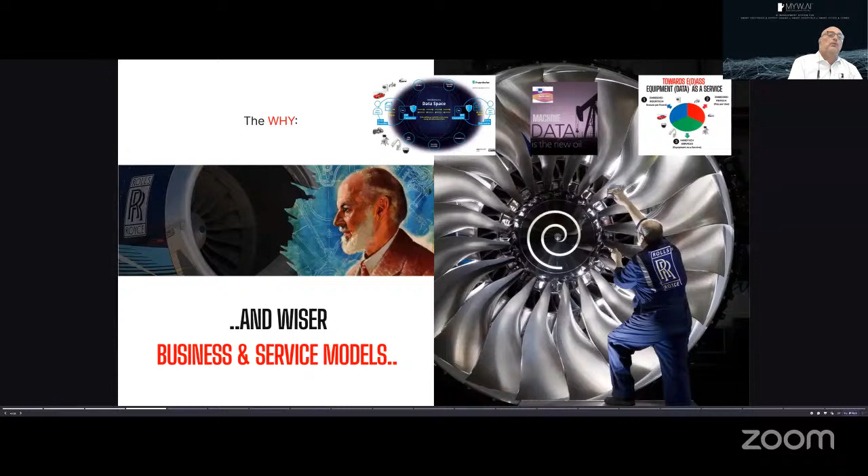We were quite lucky to get a lot of investment from the European Commission and the European Space Agency for the technology. Today, having developed and tested the system, we see smarter machines coming out more and more every day, not only in very critical assets and infrastructures like plants and smart cities, but also in energy tech fields and ports, and even new markets like those producing electrolyzers and green hydrogen.

Up to clinics and hospitals, where wearables and machinery are getting more and more connected and starting to deliver new services and goods on a continuous basis. It's really a revolution happening while we're talking. The ecosystem around these machines is getting more broadband and connected, and the machinery is getting more intelligent.

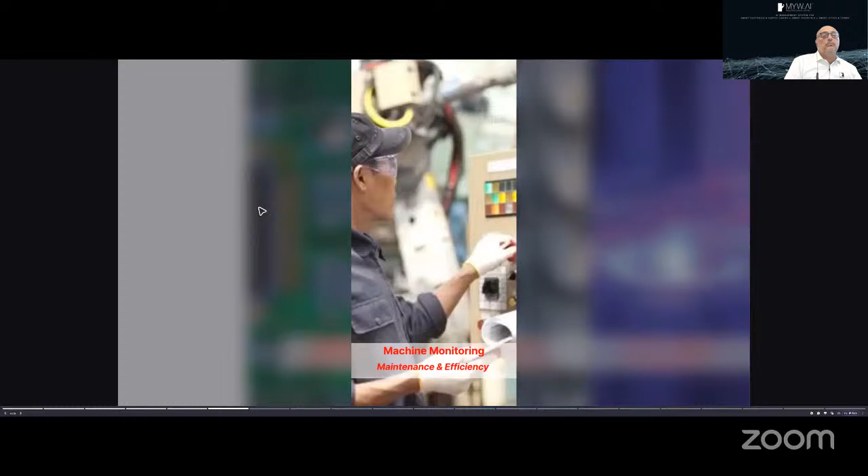At that point, it's quite evident what services you can deliver, starting from the most traditional ones: reducing downtime of machines, which pays for the deployment quite easily within the first or second iteration, because machines break down very often, and just a couple of minutes of stoppage in the automotive industry is worth billions of dollars collectively in the US per year.

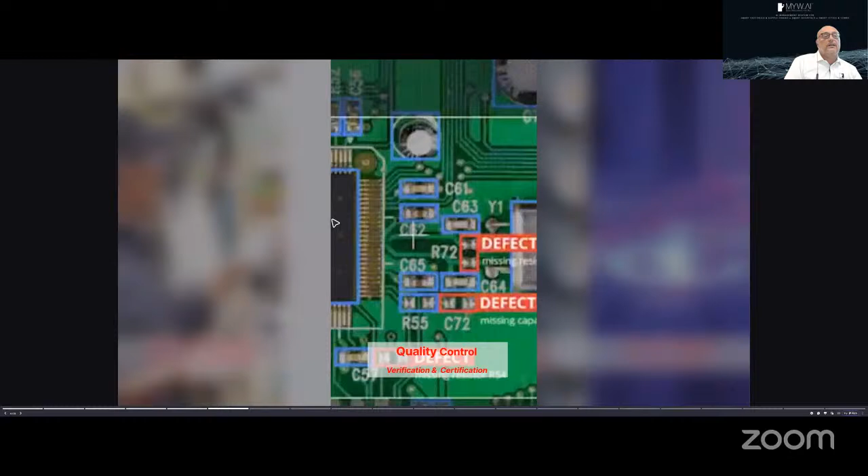The other big market is quality control, where you can go online and verify and certify the goods you're producing, down to energy saving, another big buzzword of the moment, where you can study the consumption behavior of your machinery and maybe pay the grid and pay for energy at optimized timing.

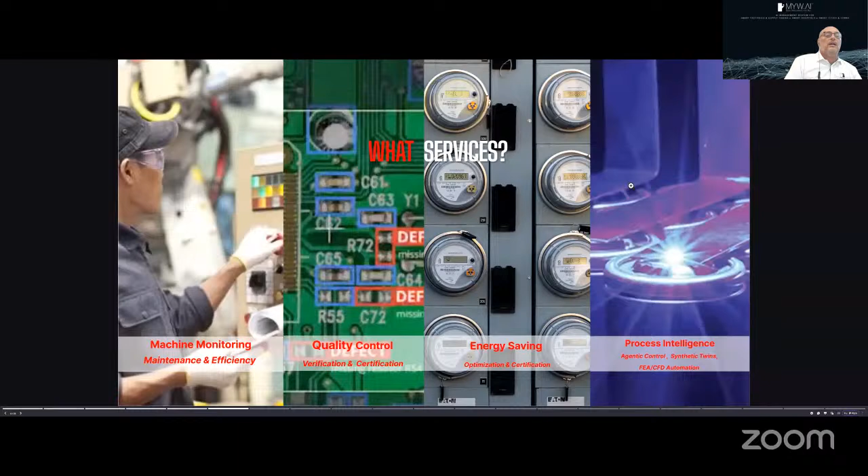And last but not least, the new frontier, which is not only controlling machines in terms of quality of production and breakdown times, but also feeding back control with AI agents able to control, instead of PIDs and other controllers, how the machines themselves work.

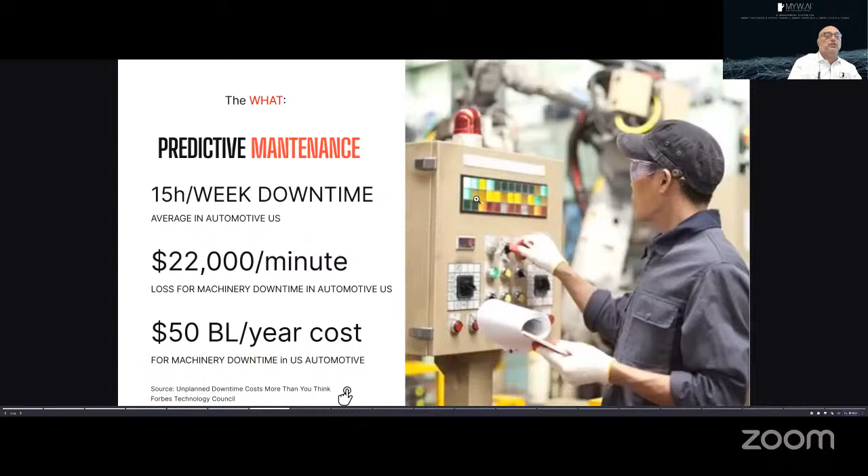So we start with very traditional markets - 50%, 80% of our implementations deal with predictive maintenance. I was summarizing the numbers before: huge breakdown time and cost. This is just for automotive in the US, so 50 billion dollars a year cost just for those minutes that machines stop in the automotive sector in the US, plus huge cost for missed quality.

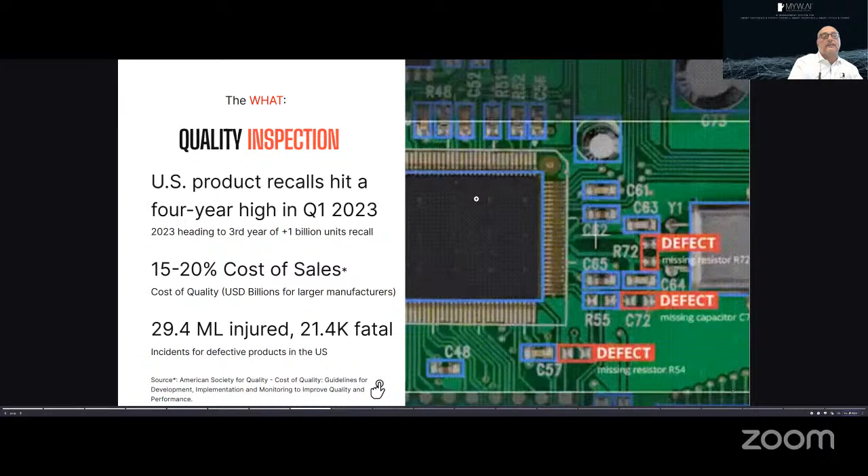So the missing quality cost is huge. It's averaged up to 15-20% of the overall cost of sales in manufacturing. There's not only production and business issues here, but people can also get injured by wrongly produced assets, so quality inspection is another huge market.

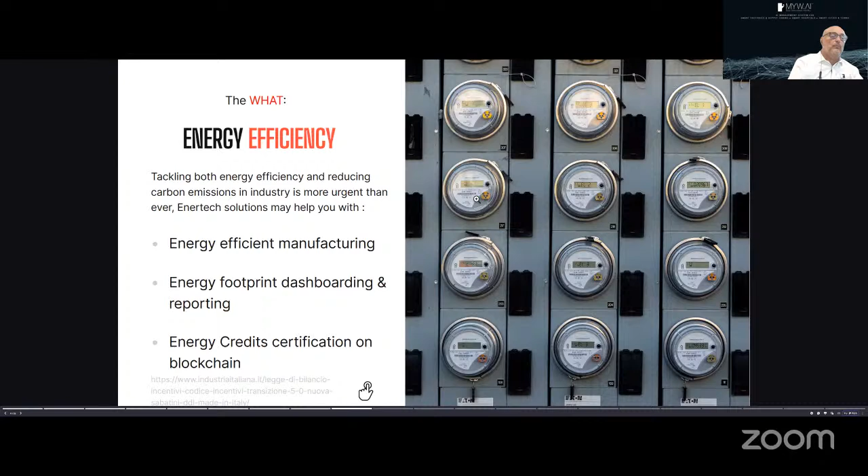When it comes to electricity gains and electricity optimization, efficiency of manufacturing machines, there's a lot of regulations coming out worldwide, where you get energy credits if you can certify, maybe on a blockchain, that you're actually consuming less from the grid thanks to optimized usage of the machine itself. You're surely seeing this in your organizations, tackling it from different perspectives, POCs up to big systems, working more or less effectively, but this is all quite well known.

What's happening while we are talking is that these things are getting even more nested inside the production processes. We are seeing the emergence of what is called agentic AI, where AI is not only able to get data and analyze it, but this data is becoming multimodal. So you can also hear from a production line what sort of defects are going on, you can see them with thermal cameras, touch sensors, or whatever, or you can have time series, and blending these together is much more effective as insights to machine learning than monovariate streams are.

The other thing these agents are able to do is start reasoning. They're able to do things like chain of thought, which is getting very popular with the new ChatGPT outcomes. You're actually able to take a sequencing if-then-else approach to the things that you're sensing, and also use external tools to actually do the sequencing of your decision making. This actually means a very clever AI, which can be put together with humans in the loop to control machinery and what's coming out.

And the next steps are going to be physics, maths informed information, spatial intelligence, and so on. This is what we're working on in MYWAI. We are adding to the platform the ability to control machinery. So for the Stellantis case that we will see, we have reasoning agents which are substituting PID controllers.

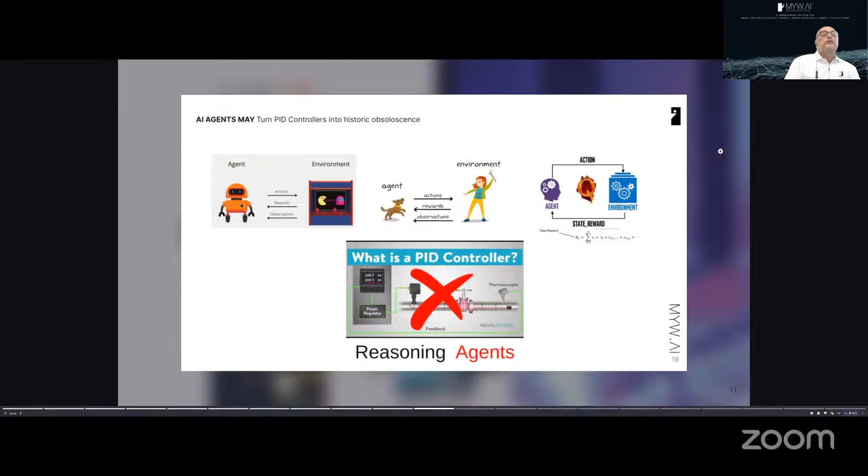So these things can be controlled live by a robotic agent, which actually sees what you are doing with the machine, how the machine is actually performing. And if you give it rewards, it's able to learn the law of what is actually controlling much better than a PID. So reasoning agents are coming to market, and these reasoning agents are starting to learn physics and maths.

So you're presumably using computational fluid dynamics or finite element analysis in your designs, in your buildings, in your machinery. But those softwares are very costly. They come with errors because it's a finite analysis, and also they are very latent, so it takes a lot of time to actually do simulations.

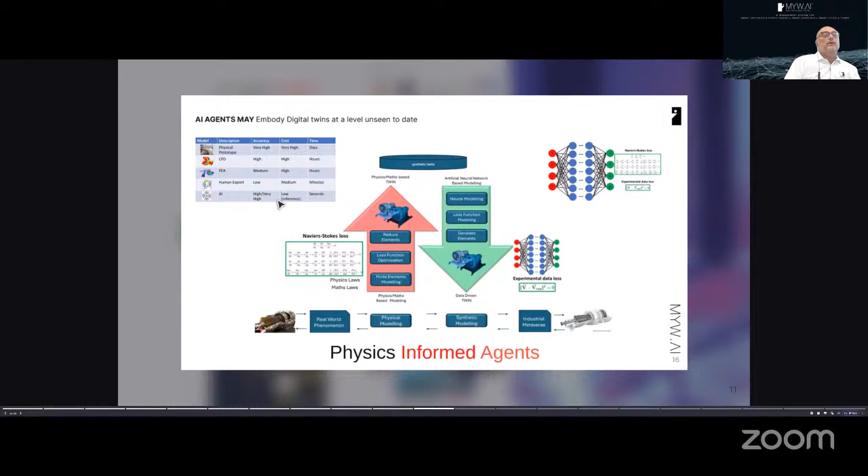Now AI is not only learning text or sentences, it's actually learning physical laws like Navier-Stokes and others, so that they can create digital twins which have got a soul managed by AI, able to actually react to the changes that humans are giving them while they are operating. And this can happen, as you see up here in the top left corner, much faster and with much better accuracy than traditional FEA software or CFD software.

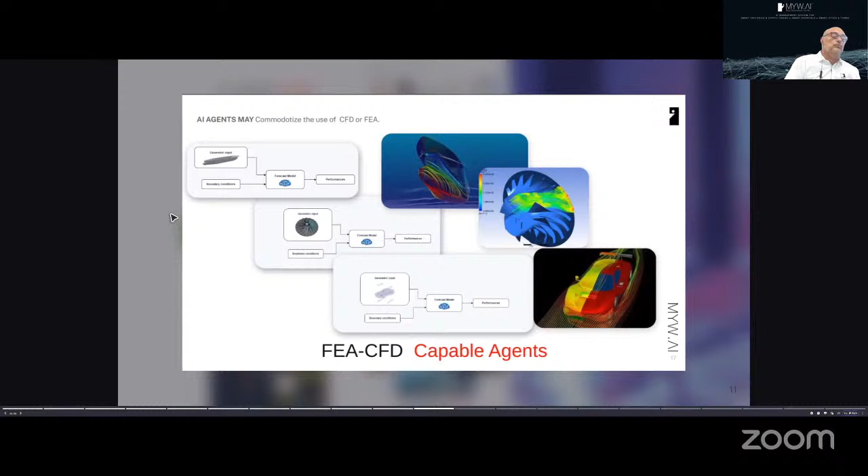And that's a big convergence for mechanics and hydraulics. You're actually merging the traditional world of modeling with agents which are learning such models without the need of actually modeling too much. You're just measuring the input-output of your ecosystem, of your machines, of your process, and so on.

And so the very next step that everybody's talking about is all of this learned by machines in the environment where they are working. And since the work environment is actually designed for human beings, the robotic revolution where robots will learn this more and more will happen overnight while we are talking. That's quite easy to imagine given the latest announcements from robot producers and manufacturers.

So we're doing all this in MYWAI, and why should you come to MYWAI with so many offerings out there? Well, first of all, Europe, Italy and Germany are very strong in manufacturing. Studies from Google and Amazon actually say that the day-by-day use of AI is at its highest stake in Italy and Germany, where other markets like the US or the Asian market are more sitting on fences to see what's happening in this sector.

This is also from Google. We have Google and Amazon studies on cloud which state that if something new is going to come out in the consumer market, it's surely going to come from the American market, from the US. But if we're talking of manufacturing, there is still a play for Europe to play its role, and it's a huge market.

It's only talking about equipment as a service. These are estimates, and if you think of servicing devices, appliances, equipment out there, it's going to be a very big market. So we set up this company with a lot of funds from the European Commission and the European Space Agency, which was interested in, let's say, satellites, for example, which is literally a very good market for intelligence and putting intelligence on machines.

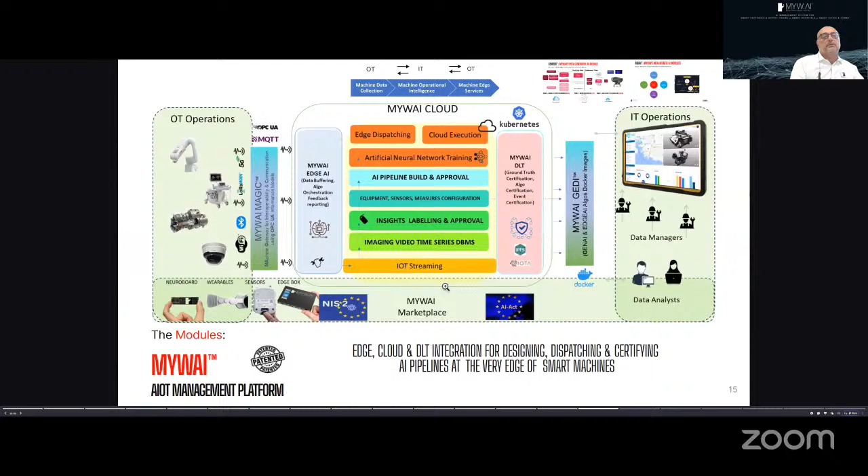So it's got different modules, cloud, edge, and blockchain, but I'll skip this. For the technical guys, it's a multi-cloud Kubernetes and Docker-based infrastructure, so it runs on any cloud. It can be installed behind a firewall on premise because there's a lot of very critical and sensitive data that people don't want to give out.

So it's a white label infrastructure that you can import inside your infrastructure and manage all your AI projects, or you can use it on a paid seat basis into the cloud. We'll showcase a little bit of scenarios and case studies.

This is the interface for the Stellantis group, the automotive world leader, where you can configure your machines, your sensors, your equipment. You can import massive amounts of data, either from Historian or from live machinery connected to the MYWAI infrastructure. You can load your algorithms using Python, Docker, or an open marketplace, and then deliver orchestrated intelligence, either on the cloud or at the edge, using a software edge which creates the data streams and actionable AI to bring feedback to the cockpit.

We've done a first traction of the system with world-leading players. For some cases, a lot happen to be Japanese, but there are also a lot of European and American players we are talking to, like Mitsubishi Electric, world-leading in many things, but surely in robotic fleets.

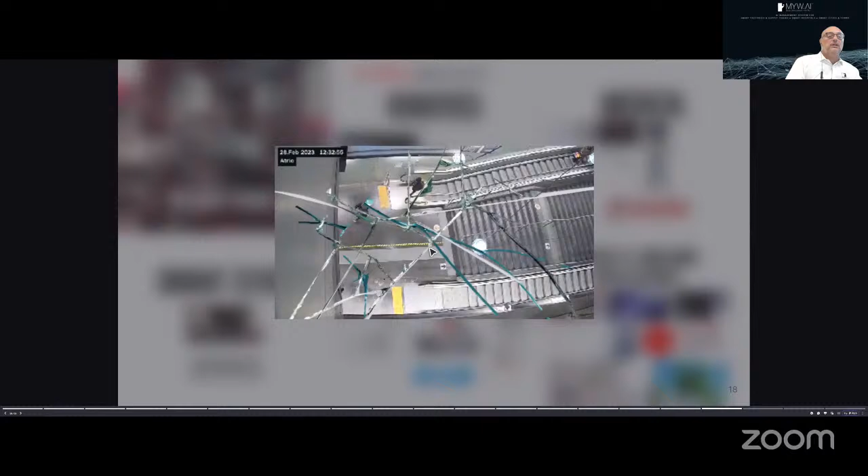So what we used here is a lot of generative AI for creating these sample images. This is not a real image - it's generated by a pix2pix Gen AI algorithm. By using these AI-generated images, we train the edge to actually detect different defects of the camera system.

Hilex is a world-leading manufacturer of window lifters, one of the two in the world. This is Japanese - the other one, I think, is American. They create electrical engines for the window lifters, and they've got a lot of problems because the workforce is getting older and not able to detect malfunctioning window lifters. So the quality check is getting issues, even more because with electrical vehicles, the noise level is going down, so they're not able to detect it.

So we put an electronic ear, managed and powered by MYWAI, side by side with the human to learn his ability to detect defects. And we're talking with the SCADA system to feed back correctness or incorrectness of the production, so they can eventually move out the production units which are wrongfully assembled.

Last but not least, what we will be showing today is the key market of intelligence when it comes to very high-end sectors and multi-physics sectors like welding and energy production. So in the welding sector, we are doing control of welding machinery from arc welding to spot welding to laser welding.

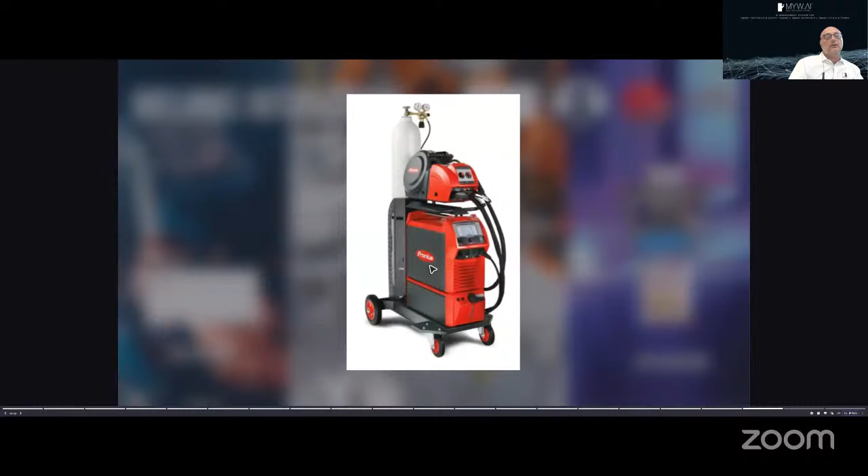The demo that Ricardo will do - but I will take some questions before entering into that - is going to show you interfacing with a welding machine, a world-leading Austrian Fronius machine, where we take up all the data and do intelligence about the welds.

In arc welding, we will then see some spot welding where you have machinery like this one, which is actually joining the parts of a white body in an automotive market. And again, we are controlling the quality.

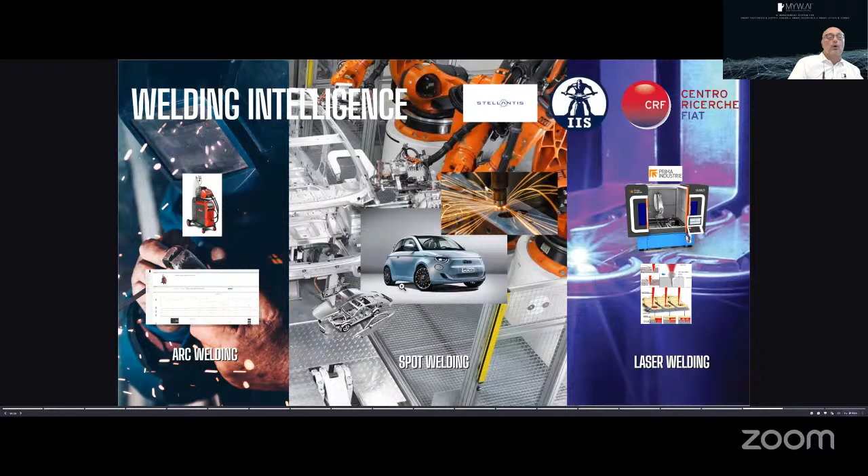But last but not least, the most important one, as I was saying before, is controlling the welds of batteries, where things are very, very complex. It's a multi-physics phenomena, and now it's regulated by a PID controller.

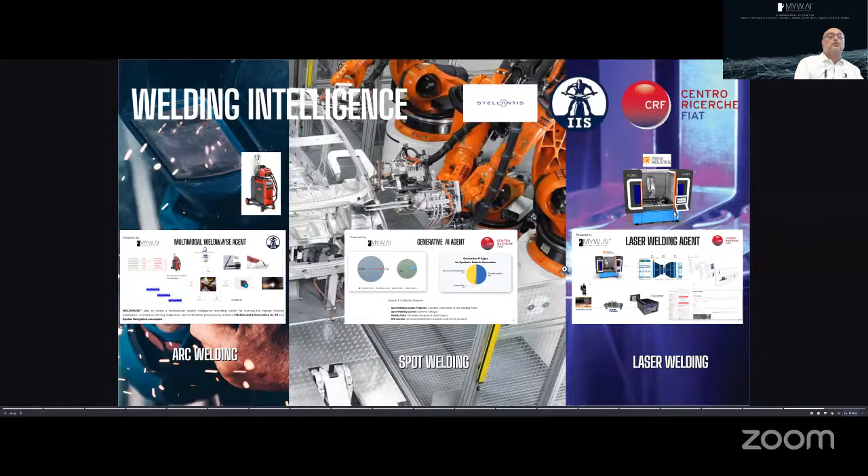We are putting agents, so we are developing three agents. One is for multimodal reasoning on top of the quality of welds, not only hearing the acoustics, but also the data from the machinery, the movement of the welder, and thermal vision of the weld itself. Then we're using generative AI to produce the specs of the welds, because they are always quite limited in terms of what they give you to train the algorithm.

And last but not least, as I was saying before, we are doing a plug-in toolkit for an agent which is able to control actually the welding process in line, doing it much better than traditional PID-driven PLC controls, usually managed by the Siemens and Rockwells of the kind.

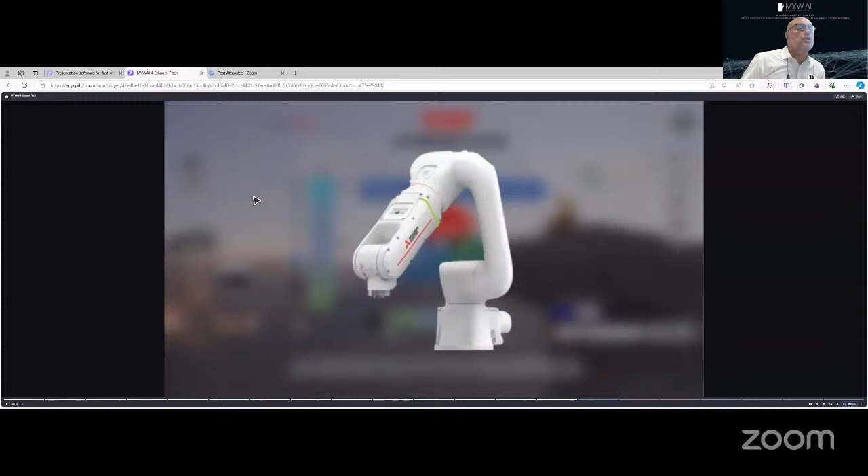So overnight, those 500 machines became companion specs of OPC UA. Today you have more than 500 digital twin semantics to interoperate, so that you can take off the robot from Mitsubishi and put in the KUKA one or the ABB one, and you will not change a line of code of all the intelligence behind it.

That's a huge improvement, because if you're a service provider, as soon as you unbundle the market so that you're not tied into a single vendor, the market would explode. That was the vision of the Germans, and now it's embraced by a world organization like OPC UA. And I'm lucky to say that with a patented solution, MYWAI is one of the first AI platforms for machines in the world which fully embraces the companion specs, not only the basic OPC specs that everybody embraces.

Okay, thank you Sachin for the question. One more question, particularly on this agentic control. Could you elaborate what is the concept of this agentic control and how it will help us enhance process intelligence, as well as how it can increase machine efficiency?

Yeah, we'll see all this in the demo, which might be much easier. But as you see here, you don't read it — there's a marketplace in AI. This is the Stellantis solution, world-leading automotive. They've got a marketplace where internally they are developing toolkits, and we are developing for them. This is the quality agent — an agent which is able to be trained, you see it here, on welds. So you tell it the quality of this weld. Initially, the agent is quite dumb.

It doesn't weld well, but as soon as you start doing trial and error, it learns, thanks to the fact that the Precitec laser welding head has feedback sensors. It tells you if the depth and penetration of the weld is going well or not, and so the agent learns. It's a transformer convolutional network which learns the quality it's actually measuring live, and it feeds back live to the welding power. It's a real-time feedback loop, not a PID PLC driven interface in the traditional sense, but an AI agent driving the welding laser.

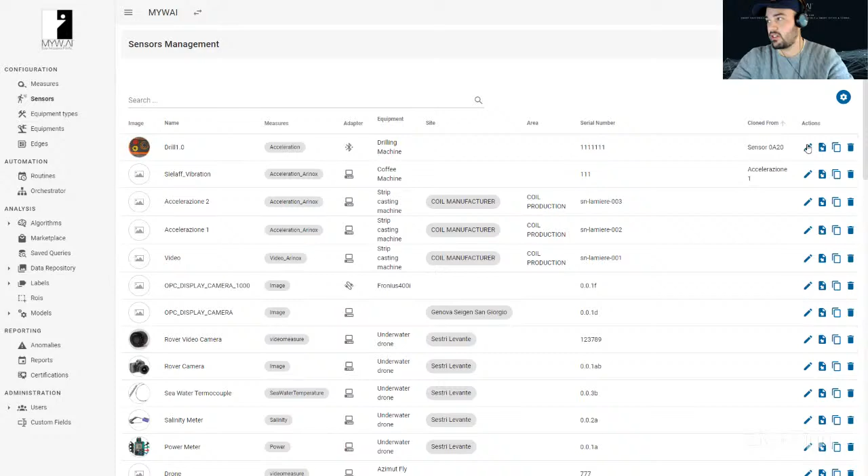Since we are a multimodal based technology, we can accept acceleration systems, video cameras. I'm opening the first one, where you see the measure is an acceleration. I define the frequency at which I receive the data points - I might need 40 milliseconds of data points, very fast, or just every second. It depends on the use case.

The key point that Fabrizio was explaining is this part called the adapters - this is the part responsible for attaching the sensors to the platform, which is attached to the edge device, and enables the data flow from the field to the MYWAI platform.

Now what was actually the last question asked by Sachin is the equipment type. Basically what Fabrizio and Sachin were discussing is that if an equipment, an asset, is equipped with an OPC-UA server, what I can do is just import as a plugin, with zero code, the tree formation of my equipment.

In this case, I open the robotic arm, where you can see protocol type, axis type, and for each axis I can see the actual speed, position, acceleration. I didn't need to code anything for this - we just imported the semantic model of my robotic arm in a plugin way.

This also gives me the possibility to define facets, for example for dashboarding. I don't need the device health type, so if I know how to modify my schema, I can highlight what I need and delete what I don't. Once we've defined the sensors and the equipment in general terms, it's time to configure the instances, okay?

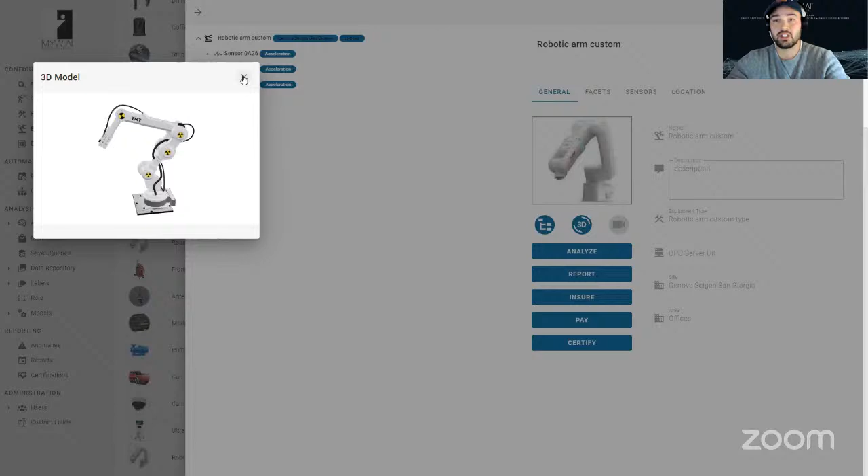Inside the platform, but in case I don't want to use the OPC-UA server for any regulation or norms, I can attach, like in this other robotic arm, 3 accelerometers to register vibration analysis. We're also working, as Fabrizio mentioned, on digital twins that we want to hook up with the data to have a perfect digital industrial metaverse at our disposal.

Now I'm going to go straight to the fun part, which is the analysis. If I had a robotic arm attached right now, we would be having real-time data flowing inside the platform, and that will be the case for the welding machine. Or we can do, for example, historical analysis.

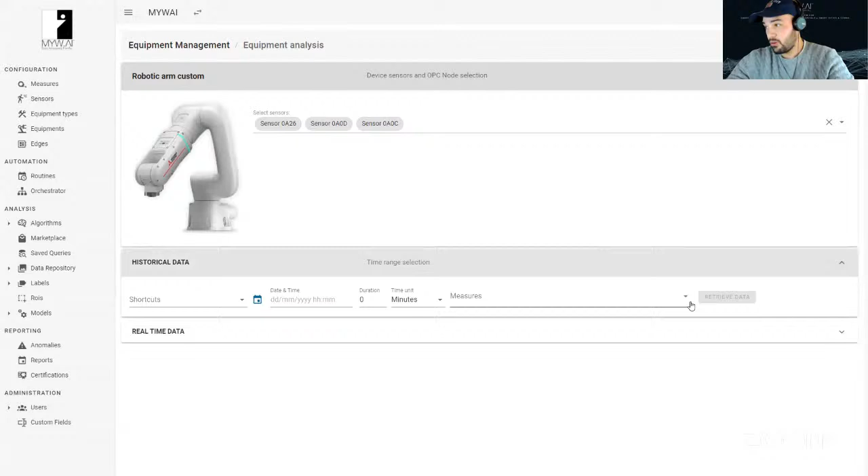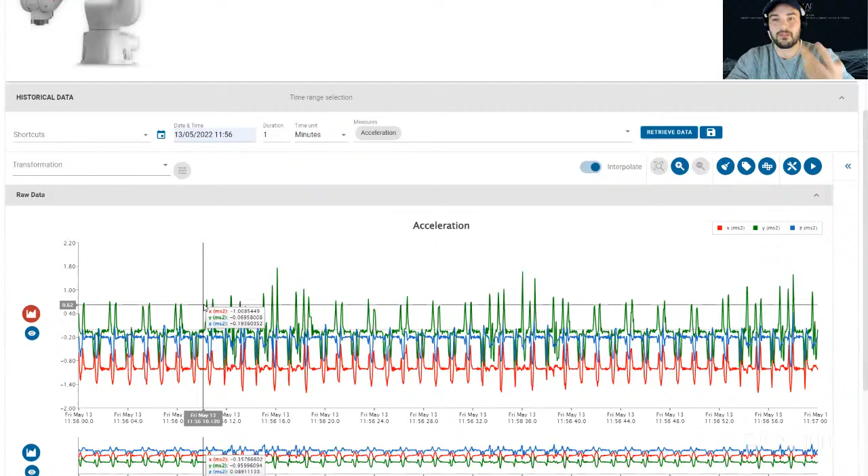So I'm taking, for example, a minute of acceleration vibrational analysis for the Mitsubishi Electric robotic arm. What you can see here is that there are 3 graphs because we're using 3 accelerometers, and each of them is registering basically 3 dimensions, X, Z, and Y.

As a normal user of the platform, I can open it up and zoom in, because we are a multimodal based infrastructure, and via TimescaleDB we can accept time series and zoom in to see what is performing. I can highlight, maybe I just need one axis for this analysis.

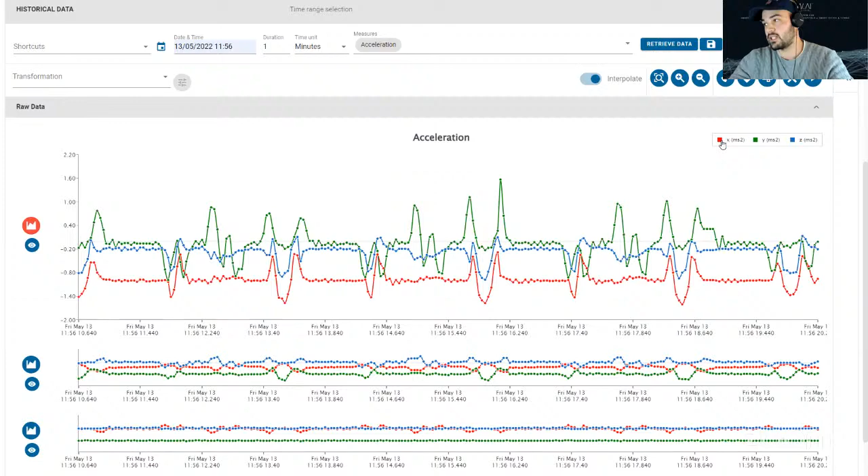Once I see all this data, I might be confused like you, wondering what this data is supposed to tell me. I can do two things. First, if I know that from this point to this point the robotic arm is performing a certain activity, I can label it. I can call it, for example, demo day activity, and this is what the robotic arm is doing.

I can then decide to define its color, and define every other label, and this constitutes the intellectual property that is going to define how I maintain, for example, robotic arms. I can decide to train my algorithms on these labels.

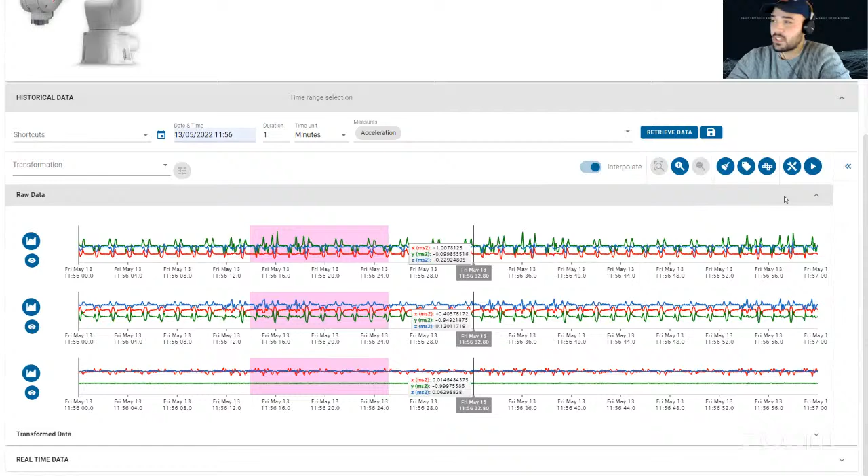Another interesting thing is that instead of doing supervised learning by creating my own labels, I can do unsupervised ones. So I'm applying, in this case, clustering algorithms that define, okay, I want to find 5 clusters of these window lengths, which are the data points that I want the algorithm to be applied to.

As we're talking, this is a cloud-based infrastructure, working with a CPU-based only cloud infrastructure. It took some seconds, but here we go, we have our 5 clusters. We can see here the green one, the red one, the blue one, and it just created automatically my labels.

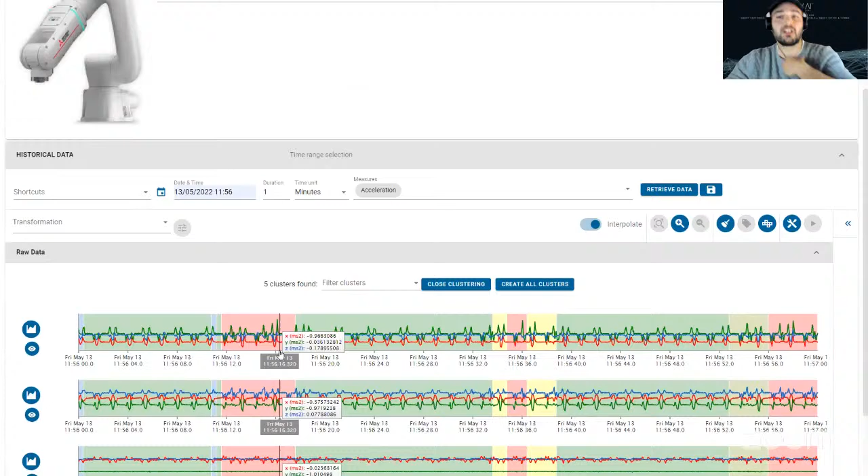The cool thing is that it's not just me deciding these are the widgets, the labels for the predictive maintenance of my robotic arm. What I have to do first is pass through a GitHub pipeline where I need to approve or abandon my labels, so that I can certify my algorithm and push it, for example, to the edge, or run it on the cloud.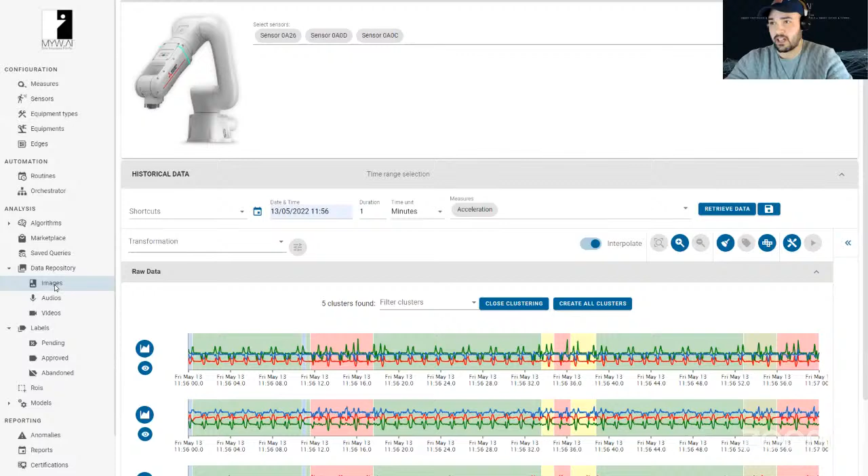To go further, for example with images, we have some use cases. Fabrizio mentioned earlier about ultrasound devices. We have an ultrasound use case with EthAum, where we performed anomaly detection, detecting if the echographers were performing well for patients in Italy.

While on the others, it successfully detects the defects inside the pictures. Then, once the algorithm is ready, where is it located? In the algorithms module.

This is the part that Fabrizio was trying to explain, how this is an AI management system where we can develop algorithms. Third-party algorithms can be developed, even open source algorithms, like the one I was showing, Pix2Pix, the generative AI for the Hitachi case, where you see the synthetic cracks.

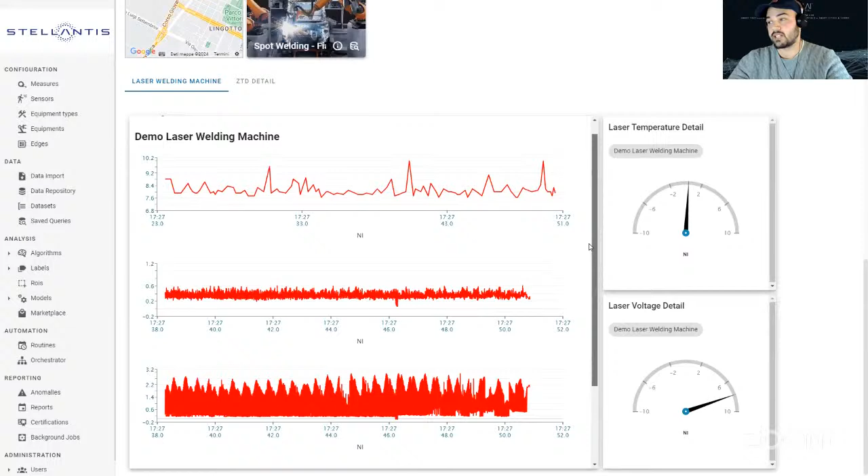This is the dashboard I was mentioning before. These are data flowing directly from a machine right now that is performing welding procedures in a real-time environment. Now let's go directly to our equipment.

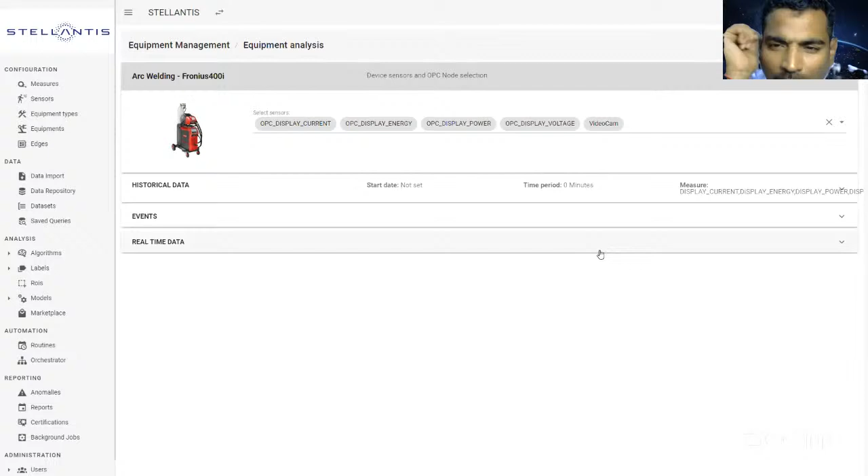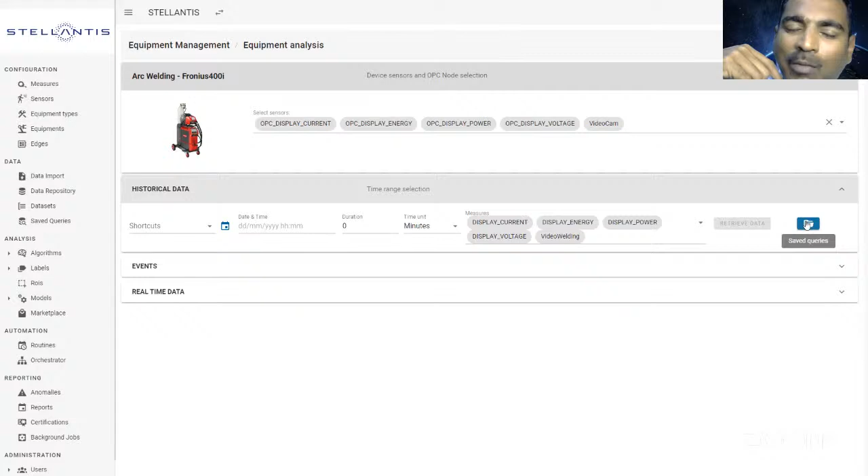Yeah, Sachin, please go ahead. Yeah, when it comes to this, particularly the computer vision solution you developed in this application — is there only one image on which you determine whether it's good, labeling that this is a good image, and then from that single image you can determine what the defects are? So only with one image can we do this kind of analysis, or do we need a multiple image model? Very good question.

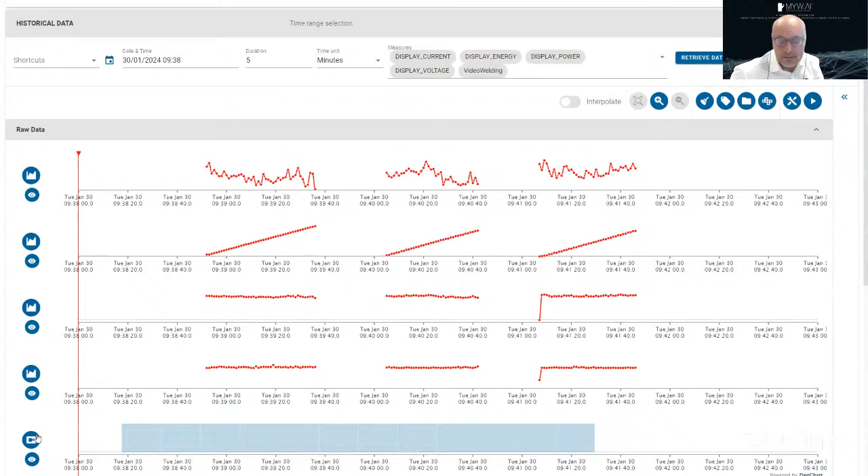That was done for EthAum, where we have a digital signature of the probe. The probe comes with a root of trust chip, which says I'm exactly probe number 2021-22 attached to that ultrasound. So the AI can learn the patterns even from a single image and detect the differences from the original product that came out from the manufacturing labs. That's one option. If you need to train on generic probes, obviously you need to give a lot of images, depending on the differences across the images.

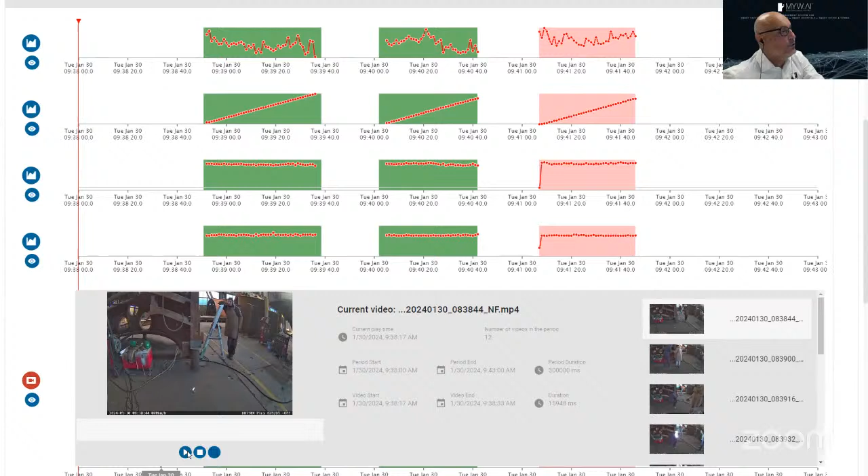And finally, there is PatchCore, one of the algorithms we uploaded, from Amazon. It's open source, and it gives you heat maps depending on the defect presence, but it learns only good trials. So you can train the algorithm with good samples, and it automatically learns the concept of 'good,' and anything that differs, it highlights with a heat map. We didn't show it in the demo, just for sake of time. What you're seeing now is a multimodal algorithm.

So in this case, we are syncing machine data, as you see here, with video streams. The video stream, which was the question of the Panasonic representative, we're just using it for backing up the synchronicity of the data, so it's not used by the algorithm. When you see it start welding, the data will start being detected, and the algorithm is telling you if it was good or not, as a historical registration. This is just a webcam.

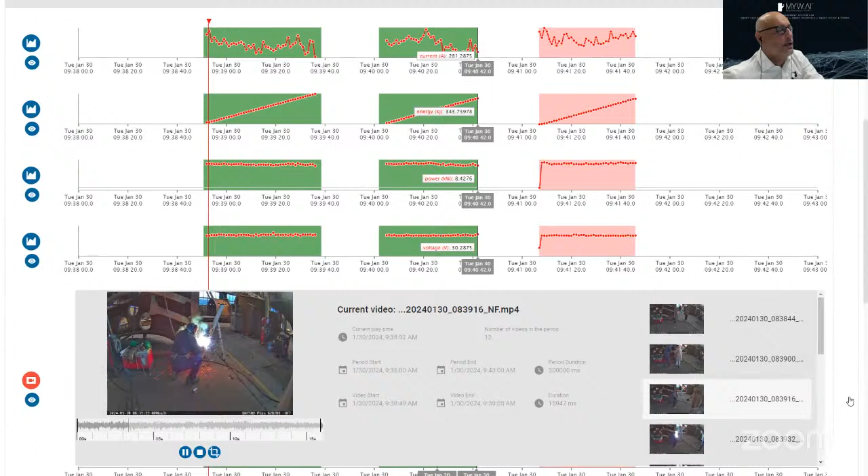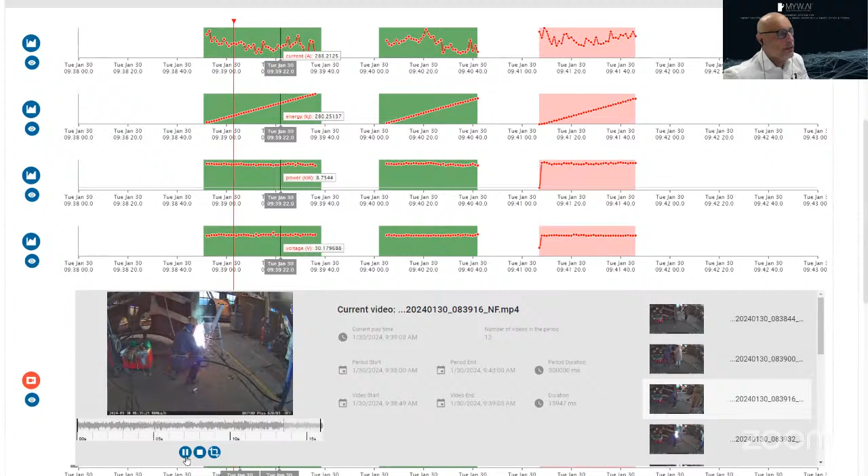But if you add a thermal camera, and we are now adding a thermal camera, that influences the algorithm too, a multimodal algorithm. The good thing is you can have hundreds of algorithms. You just upload them, and they work on the data, distributed by the platform. So the platform is an AI management tool for multiple scenes, scenarios, and algorithms.

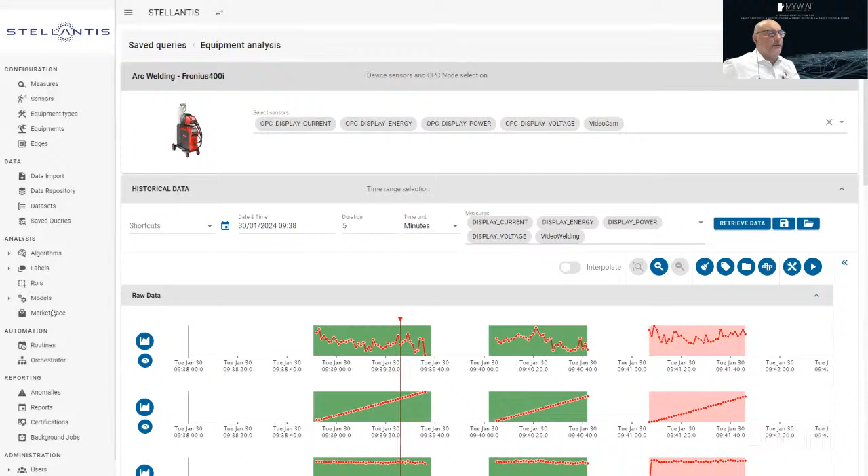This is the agent he's actually showing now, the welding agent, which is in the tool. There's a marketplace, and that black part has been nested inside the platform. It's been completely designed for creating the agent which is going to weld.

It needs to be trained on quality. So there's a UX where an expert in welds can teach the agent what is good welding quality, by interacting with the interface. It's saying that from these samples, these are good welds, giving it a weight. So it's a weighted function that the agent can learn with reinforcement learning.

Initially it's welding not that good, but when it reaches a steady regime, because it's actually measuring feedback from the sensors on the Precitec welding head, it's going to do a very good welding.

We can see an end result and close it there, Ricardo. This is a historical weld where he's running the agent against the PID controller. The one in reddish is the PID controller, where the power array is constant, whereas the greenish on the top level side is the adaptive agent. It adapts much more than the traditional PID. The resulting quality, the final line there, is the improved quality coming from the adaptive agent.

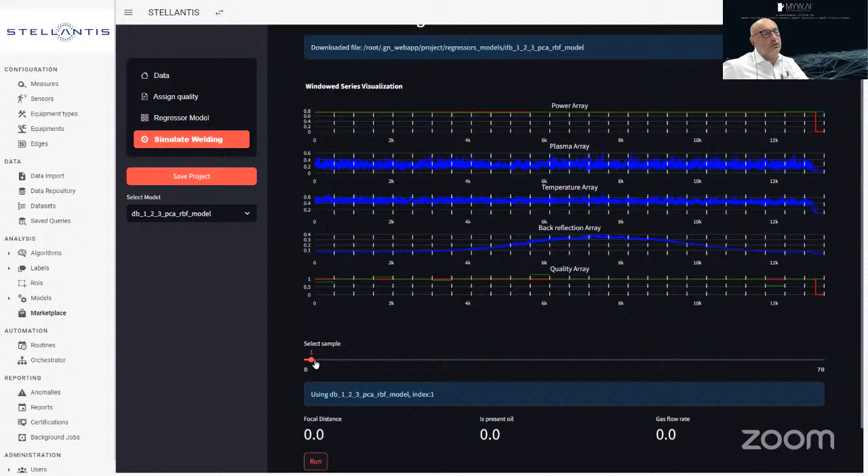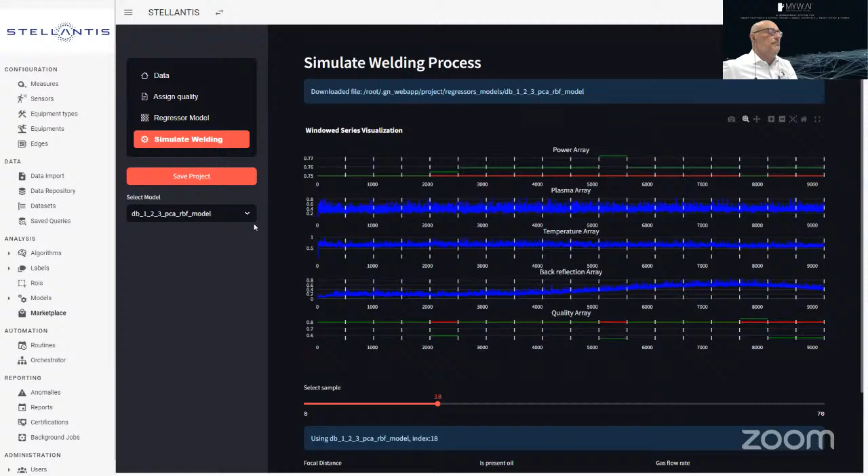Okay, I'm conscious of time, I'll stop here. Obviously it's an enterprise system, meant for getting into the core part of database management systems, ERP, MES, PLM. These systems will start crawling into large organizations. We are one of the world's first—there are a bunch out there, about 10, three-quarters in the US, one in the UK, one in Germany. This is the last one to come out, but it's much more standard-based and multimodal AI driven than the others. Thank you, Fabrizio.